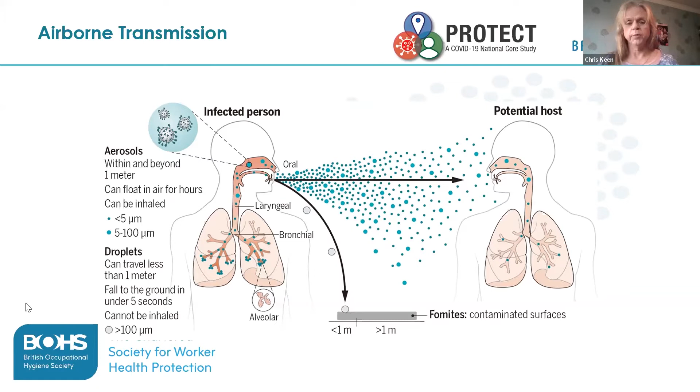And then we have aerosol transmission, which is where I'm going to focus my talk. This can happen in the far field, much further than 2 meters. When we emit droplets as we breathe and speak, you've got a range of droplet sizes coming out, and even the large droplets evaporate very quickly. They become lighter, and the lighter they become, the longer they remain airborne and the further they can travel. So with aerosol transmission, we're talking about far field transmission, and you're not necessarily safe even beyond 2 meters from an infected individual. Next slide, please.

So just coming back to the direct droplet transmission, just to reiterate what I said on the last slide, this is near field, less than a couple of meters, generally within a meter. Quite straightforward to control this transmission. It's not always easy to implement these controls in the real world, but in theory,

if we could all remain more than 2 meters away from everyone else, if we can erect things like physical screens or barriers, which will take out these droplets because they fly in a straight line, they don't follow the air currents, these are large droplets, and face coverings, both on the infected individual and on potential receptors, will all reduce transmission risk via the droplet route. Next slide, please.

When it comes to the aerosol route, it's a little bit more complicated. As I've said, these are smaller particles. They will remain airborne for much longer. They will travel greater distances than 2 meters. There are a number of risk factors for aerosol transmission. Clearly, it will almost exclusively happen indoors. It's very unlikely that aerosol transmission will go on in an outdoor environment because of the ventilation rates outdoors.

So obviously the principal risk factor is the likelihood of actually having infectious individuals within the indoor space in the first place. The duration of any interactions is important. Aerosol transmission is most likely not going to happen in a single instant. So the longer that individuals mix together in a single space, the higher the risk of aerosol transmission becomes. The activity within the space is a factor.

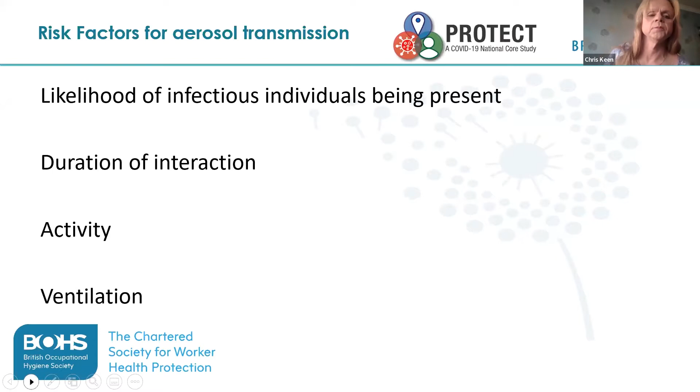So just a few basics around ventilation. First of all, air movement in indoor spaces can be very, very complex. Air doesn't always do what we expect it to do. Anyone that's familiar with CFD modeling, or anyone that's ever seen air movement visualized in a room, will realize you get all sorts of eddy currents whirling around, you get air flowing back on itself, you get dead spaces in the corners of the room. So air movement can be quite a complex thing.

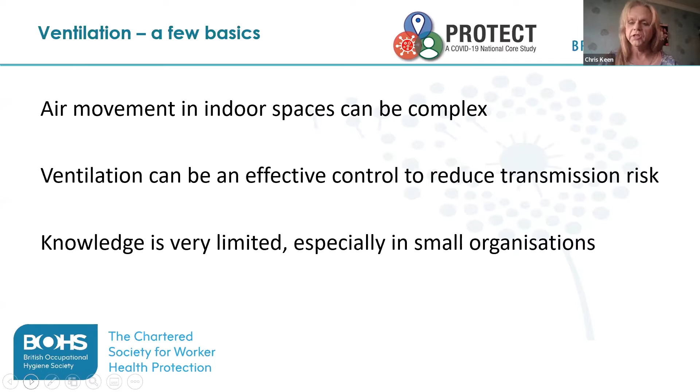There's no doubt that good ventilation can be a really effective control to reduce transmission risk. And what we've found, certainly on the Protect research that we've done in the UK, when we've been into outbreak situations in a workplace environment, is that the people that are actually managing these spaces, these buildings, their knowledge of ventilation is really rather limited. Beyond controlling the temperature in the space, they don't really understand ventilation very much at all. Next slide, please.

So mechanical ventilation I'll touch on first. So just to be clear here, we're talking about supplying clean outdoor air into an indoor space. We're not talking about recirculating air conditioning systems. They will not reduce the transmission risk in anything like the same way as supplying clean air. They can be effective if they've got decent filters in them, but you're much better off supplying clean outdoor air into a space using a mechanical ventilation system.

Within the UK, and I guess in other jurisdictions, other parts of the world, you have your own building regulations. We have building regs in the UK. They specify minimum air supply rates into various different indoor spaces, okay? What we've found when we've assessed ventilation in outbreak settings is that quite a high proportion of buildings in the UK don't actually achieve the rates that are specified in the building regs.

So it's not good enough to assume that if you've got a mechanical ventilation system, it will be turning over the amount of air that's specified in the building regs. Certainly in the UK, a lot of buildings aren't achieving these air supply rates. And I'll touch on this later on, but if you don't have a mechanical ventilation system in your building, you're going to find it very, very expensive to retrofit one. Next slide, please.

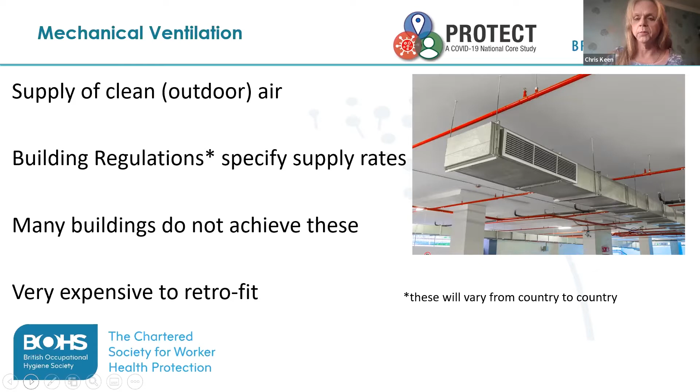How much clean air do we need to control the aerosol transmission risk? Well, within the UK again, and I say your own national regulations will be different, we talk about 10 litres per second per person of clean air being fed into a space. That won't remove the aerosol transmission risk, but we would deem that that would give you adequate control. It would bring the risk down to an acceptable level.

If you have a mechanical ventilation system in your space, it's highly likely before the pandemic that it was recirculating a proportion of the air to save on energy bills, to stop throwing warm air out of the window in the winter time. A lot of mechanical ventilation systems would have been set to be recirculating a proportion of the air. So it could well be that systems have had to be reconfigured to actually achieve this 10 litres per second per person.

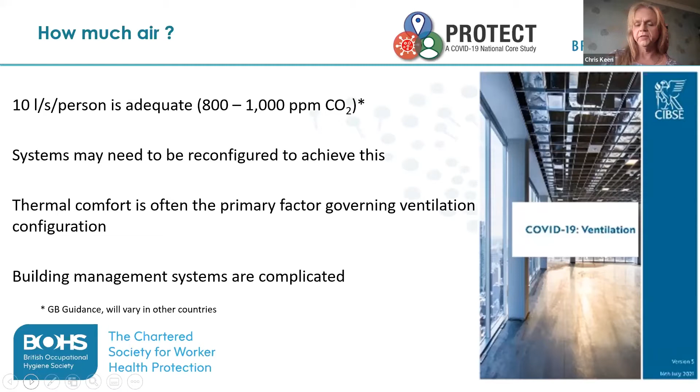Prior to the pandemic, other than specialised healthcare settings, which I'm not discussing here, I'm talking about general workplaces here, most people don't think about health risk management. When they thought about their general ventilation systems, they were there to control the temperature, the humidity, the comfort levels in that environment. They weren't there to protect against the transmission of an airborne virus. So even people that did understand their ventilation systems to an extent didn't understand them from the perspective of controlling airborne transmission risk. Next slide, please.

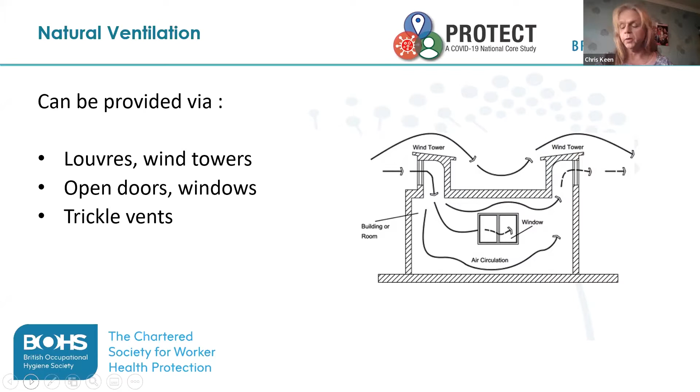I'll move across to natural ventilation now. We're all familiar with the concept of natural ventilation. We all, I guess, at some point in our homes will open the window if it gets too warm, if it's too stuffy, if we're cooking, to remove smells. You can provide natural ventilation in an indoor space via a variety of means, as you can see up on the slide there. Next slide, please.

It can be really, really simple to implement a natural ventilation solution. In some spaces, it can be as straightforward as opening windows. And we found that, certainly in some small, poorly ventilated indoor spaces, just opening the windows can increase the ventilation rates by an order of magnitude. And that can be all you need to do if that's possible.

But it is often the most practicable option. As I said before, if you don't have a mechanical ventilation system already installed in your building, it's going to be a big job and an expensive job to install one. So you're left relying on improving your natural ventilation to adequately control the aerosol transmission risk. Open windows and open doors can provide adequate ventilation, but that's going to need some management and supervision to work properly. Certainly in the UK, and in other parts of the Northern Hemisphere, it's quite cold outdoors in the winter, and people don't always want the windows wide open. So you're going to need some management and supervision if you're relying on open windows to control the transmission risk.

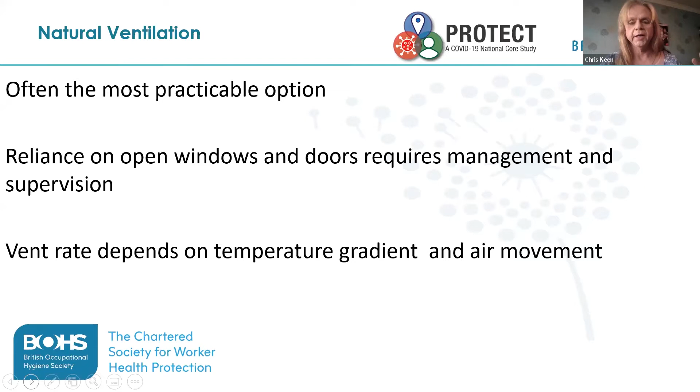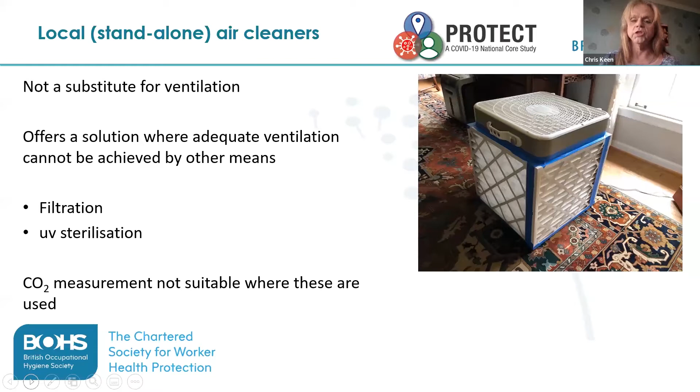I'll just say a quick word about standalone air cleaners, air filtration systems. They're not really a substitute for ventilation. They can offer a solution if you can't achieve adequate ventilation by other means. You need to think very carefully about where they're situated, about sizing the filtration unit for the size of the space and the number of people in the space. So, as I say, not as effective as ventilation, but they can offer some sort of solution if ventilation by other means is not possible. Next slide, please.

Excuse me, just let me take a drink.

So I'm going to move very quickly onto assessing ventilation. So under the Protect study, my team went out into a number of workplace environments that were actually experiencing a COVID outbreak amongst their workforce. One of the things that we had to do was to assess the ventilation in those environments, and we thought about doing this in various different ways.

We settled quite early on using carbon dioxide measurement to assess ventilation, and I think most of the rest of the world have gone the same route. It's a fairly practical, accessible option. You don't need a lot of expensive kit. You don't need sulfur hexafluoride tracer gas and things.

It's relatively straightforward to do, but you do still need a level of expertise to apply it properly and to interpret the results. It's not enough to just buy a carbon dioxide meter and walk around taking spot readings. You need to understand what you're doing. But it is a very, very useful tool to prioritize risk and to provide assurance to the users of indoor spaces. Next slide, please.

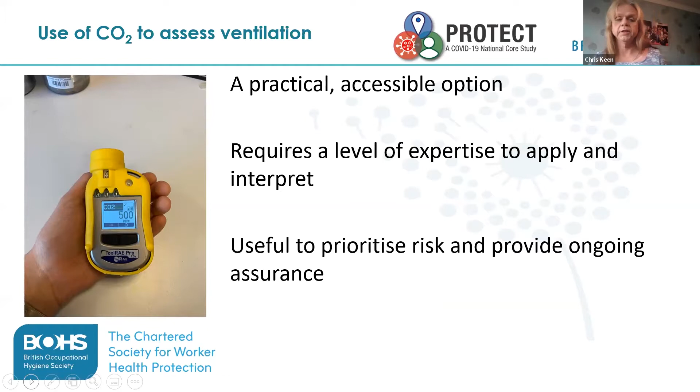I'm not going to go into all the detail on this slide. There's tons on there. I've put it up for reference, if people want to look at the presentation afterwards. This is from one of our scientific advisory committees to the government in the UK that discusses when it is and isn't suitable to use carbon dioxide measurement to assess ventilation. So as I say, if you're really interested, go back into the slides and have a look. There's too much information on that slide for me to go through. Next slide, please.

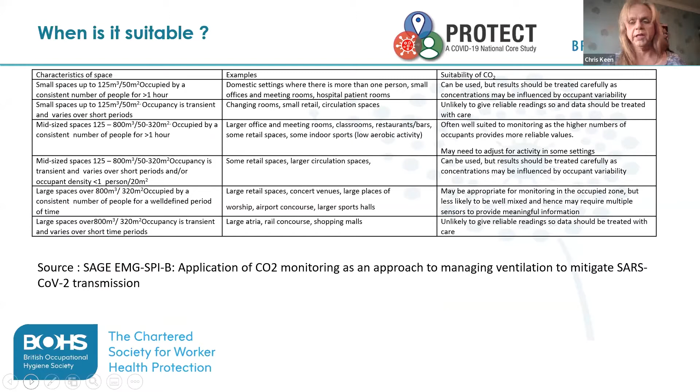When is carbon dioxide measurement not suitable to assess a space? Okay, if you've got other carbon dioxide sources present in the space, combustion being the obvious one, then clearly using carbon dioxide measurement to assess ventilation is a non-starter. We're relying here on the only source of CO2 in the space being human respiration. So if there are other CO2 sources present, either from combustion or often in food factories and some other industrial processes, they'll use CO2 as a process gas, then you're not going to be able to use this method to assess ventilation.

And if you're using filtration or sterilisation to clean the air, as I put up with the standalone unit a few slides ago, then clearly they will take out airborne particulate or they will kill airborne virus if you're using sterilisation. They will not remove CO2 from the air. So again, you're going to get false readings if you're using CO2 to assess ventilation in that kind of situation. Next slide, please.

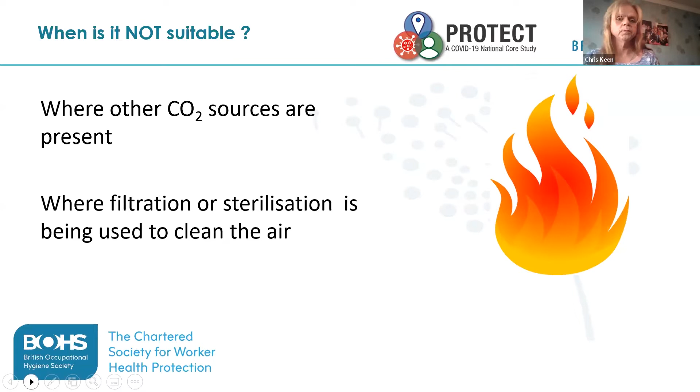So just a few simple facts around this. I guess a lot of you will know this. I'm just reiterating this. Obviously, to assess the ventilation using carbon dioxide measurement, you must do this while the space is occupied at normal, typical levels. You cannot go around a building that's empty at the weekend and use CO2 measurement to assess ventilation. You have to have the space occupied at typical occupancy levels.

It's much better to measure over a period of time, to leave an instrument in place logging for a period of days or even weeks, than wander around taking a few spot measurements. You'll get much richer data from measuring in that way. And you need to understand the occupancy data at different times of day. So if you leave an instrument logging in a space, you need to understand how many people are coming into that space, how long they're staying for, what time they're coming in, what time they're leaving, to allow you to interpret the results.

There'll be different guidance around the world in different countries, I guess, but certainly in the UK, we've settled on these numbers. If you're getting less than around 800 parts per million carbon dioxide in the space, we would say that indicates adequate ventilation. And if you're getting above 1500 ppm, we would say that indicates a pretty urgent need to improve the ventilation in that space. Obviously, there's a fairly wide band between 800 and 1500. The closer to the top end of that band you get, the more likely you need to be doing something to improve your ventilation in that space. Next slide, please.

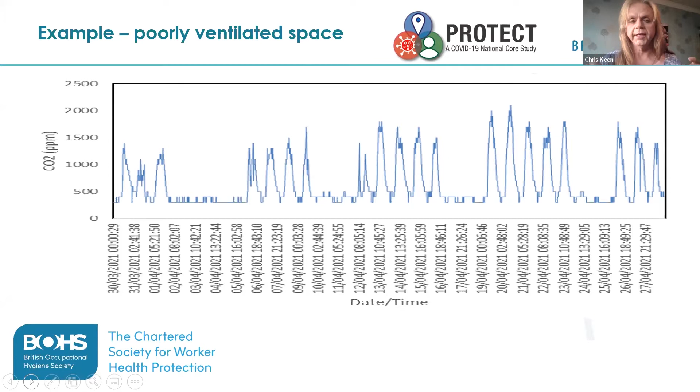So just to summarize, ventilation is often the weakest link in workplace COVID controls. People understand social distancing. They understand the need to keep a distance from one another. They understand the need for good hand hygiene, for good surface hygiene, surface cleaning. It's ventilation where people often fall down because, as I say, air is invisible, we can't see it. And it's often the thing that, certainly in workplace outbreaks, has gone wrong, okay?

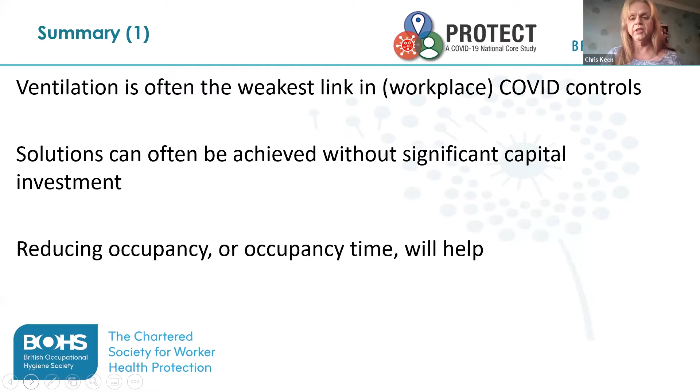As I've showed you, just opening the windows can provide significant, adequate ventilation to mitigate the risk. So solutions can be achieved without significant capital investment in some situations, okay? And if you can't improve the ventilation any further than you already have done, then the next logical step is to start reducing occupancy levels or occupancy time. All of these will bring down the risk. Next slide, please.

As I've already said, reliance on open windows and doors requires management and supervision. If you open windows and it's cold outside in the winter time, certainly in the UK, people are going to close them again. There needs to be some sort of program in place to ensure that those windows remain open. And it's not always going to be that straightforward. If you've got a complex environment, you've got restrictions as to what you can do with your ventilation for various reasons, then you may well need a specialist solution.

It could well be that you don't have the knowledge and expertise in-house to come to a suitable ventilation solution yourself. So you may have to bring in a specialist, okay? And it's important to remember that ventilation, no matter how good it is, will not mitigate against the close range direct droplet transmission, the stuff that occurs within 2 meters.

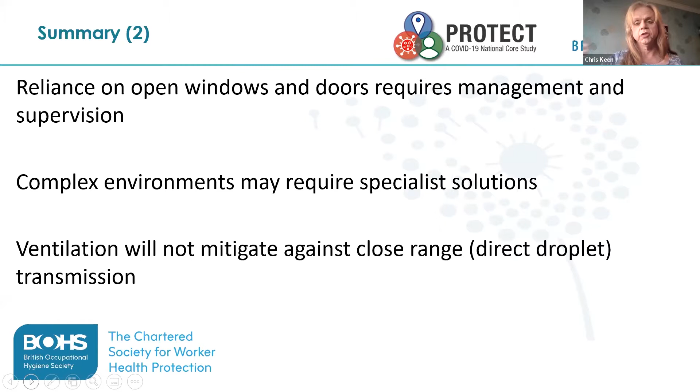Next slide, please. Just to finish, really, just to reiterate, I think we all understand this. There is no single control that's going to prevent COVID transmission in any space. You've got 3 main transmission routes. You've got the direct droplet, you've got the long range far field aerosol, you've got the surface and hand contamination. So you're going to need a suite of controls to control the risk adequately.

We've tried to represent that here using the Swiss cheese model, which you're probably familiar with. Other people have used different models, but this is just to remind that there is no single solution. You cannot control the risk with one single control. Next slide, please.

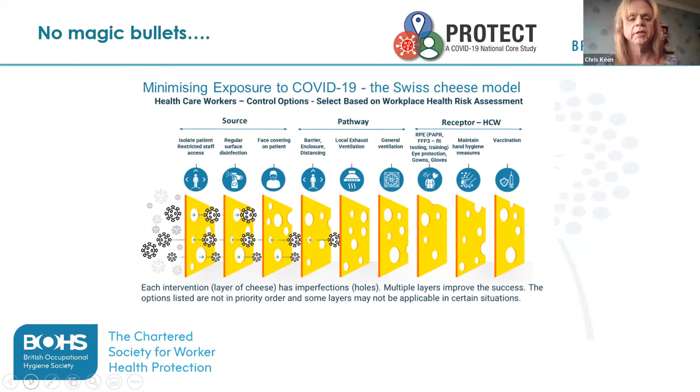Just a very quick mention of our own ventilation tool. I know other speakers are going to speak about ventilation tools that they have developed. BOHS, we have developed one. It's available on our website. You can see the link on the slide there. It's very easy to use. It doesn't provide all the solutions for every single space, but it certainly sets people in the right direction when it comes to assessing their ventilation systems. Next slide, please.

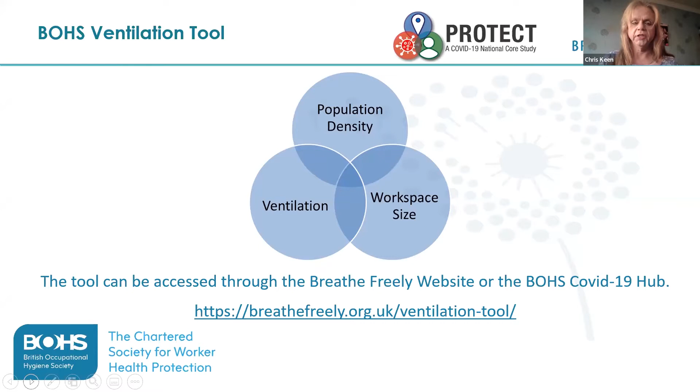And I think I've almost finished. I've put some references up on this slide just for people who want to go in and have a look and gather some more information. I apologise that most of these are UK specific. This is the area that I'm most familiar with, so I've given you a lot of UK guidance. But at the bottom there is the ASHRAE ACGIH COVID white paper, which is an excellent reference document. And I'm sure there's plenty of other things on there as well. So forgive me if I've missed your particular guidance document off that slide. And I think, Marianne, that's me finished.

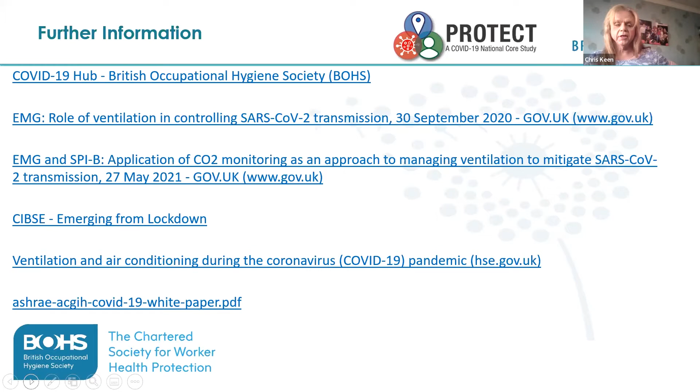Chris, that was great. That was so interesting. And reiterate what Chris said. Go back and look at the presentation because there's a lot of really good information there.

Yeah. Our next speaker, this is John Oudyk. John's an occupational hygienist with Occupational Health Clinics for Ontario Workers, and he'll talk about a tool to assess ventilation. A little bit more about John. He's worked with the Hamilton Clinic of Occupational Health Clinics for Ontario Workers since 1989.

He's been active following infectious disease exposure and prevention developments in healthcare and other settings since SARS-1, advising, and he's carried out site exposure investigations and conducted extensive surveys of healthcare workers. He's been a member of research teams investigating the conditions of infection transmission.

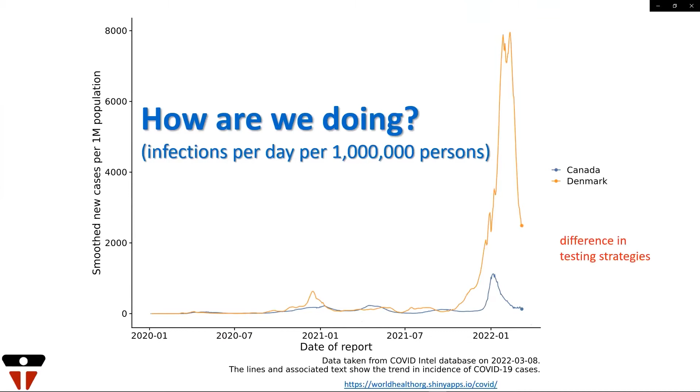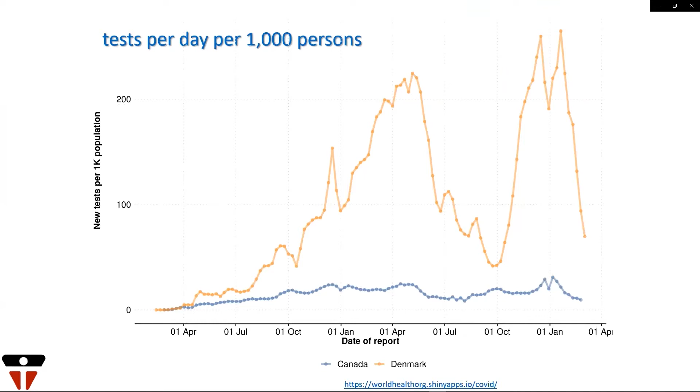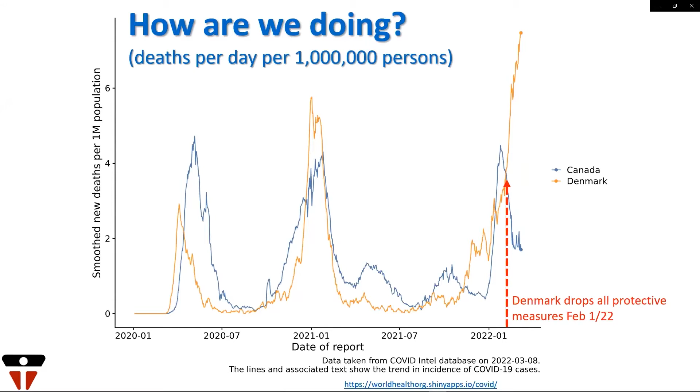So if we look instead at deaths per day per million people, this evens out the comparison a bit. And you can see that for Canada and Denmark, we've had a similar death experience for the pandemic, except recently. Since Denmark opened and dropped all measures in the beginning of February, its death rate has risen to a quite high rate, whereas Canada's has lowered. And the reason they gave was they decided that their population is responsible enough that they can manage the pandemic at an individual level, not requiring state intervention.

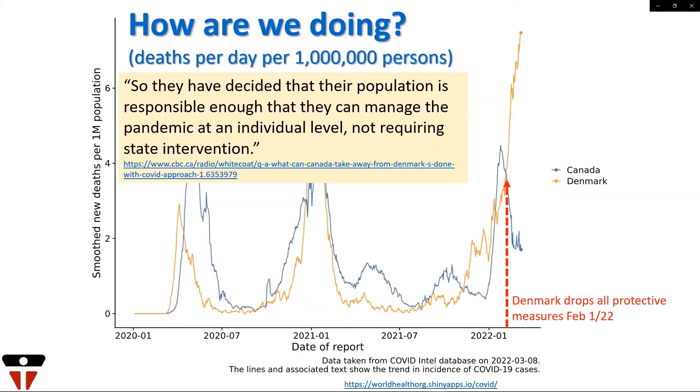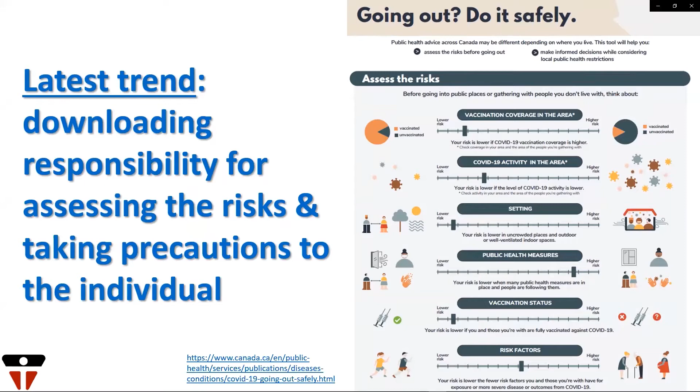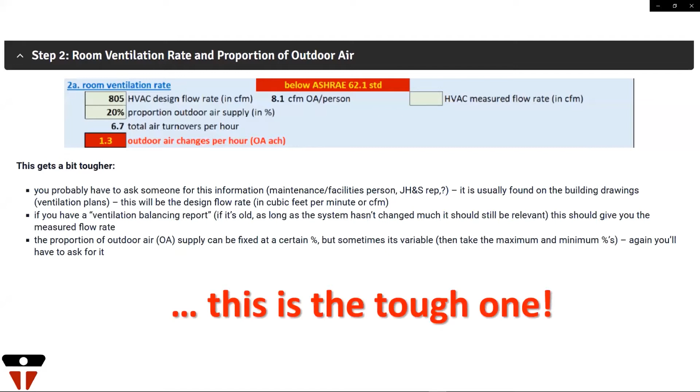Starting off, you describe the workplace, the type of ventilation, the size of the room, and the capacity. It also calculates whether the distancing is achievable. Next, you put in the room ventilation rate. Now this can be a little more difficult to get, and I'll describe a number of ways you can get at this number. So it's really the tough one to get. First of all, you can ask, but when you ask, are the people you're asking actually competent enough to answer? And do you trust them to be looking after your health?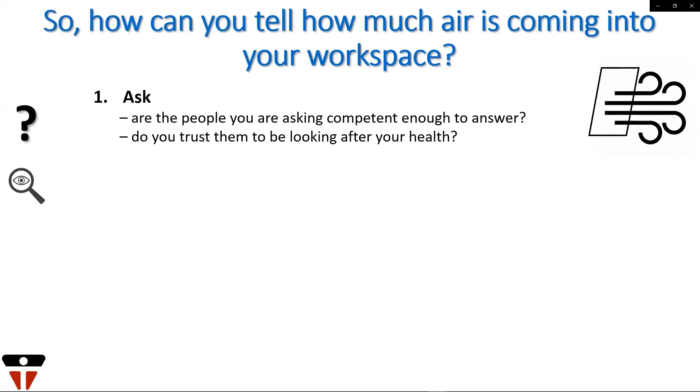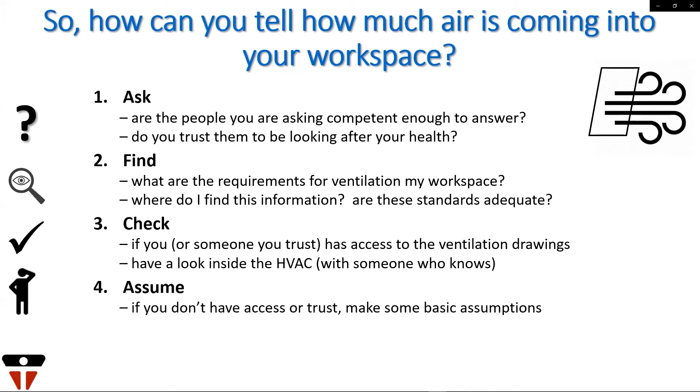You can find out what the requirements are for your type of workspace. And there are standards, but sometimes these are difficult to find. You can also check if you or someone you trust has access to the ventilation drawings. You can get the numbers from there. You can also have a look inside the HVAC unit with somebody who knows what the parts are. It's a good way to learn about the system that's providing the air to your workplace. If you don't have access or you don't have trust of the people who are giving you information, you can make some basic assumptions and compare them to what you're being told.

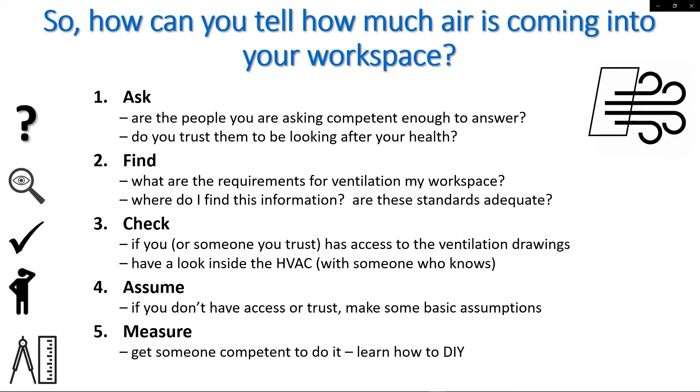And finally, you can actually measure it. You can get somebody competent to do it, hire a consultant, or you can actually learn how to do it yourself. So how much air is coming into your workplace? Find someone who knows, people like a maintenance person, a caretaker, a person who comes in to look after the ventilation system, or a health and safety rep. And you might want to check to see if they just know the number off the top of their head, or they actually have some piece of paper or some documentation to back up what they say. And if not,

who knows? One of the things you need to find out is how much of the air that's being circulated through your room is actually fresh air. What's the percentage of outdoor air or fresh air? And generally, again, the same kind of people might know, but there also might be documentation. As a rule of thumb, generally ventilation systems are designed to provide anywhere between 10 to 30% outdoor air, and the rest is recirculated air.

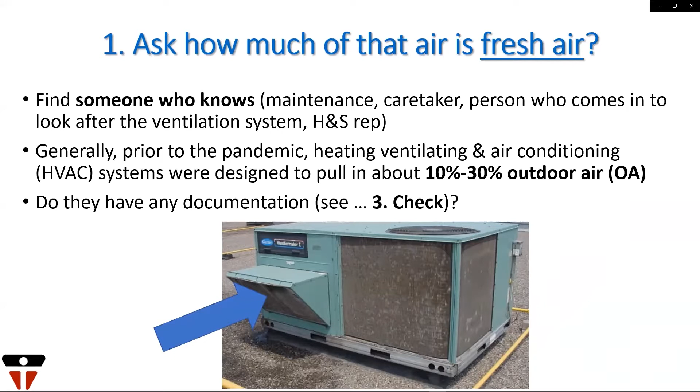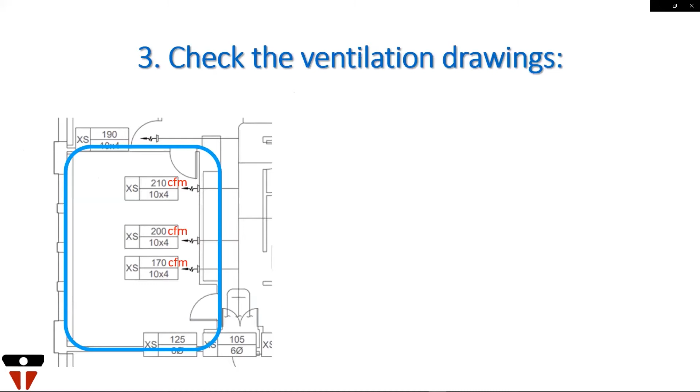You can check the ventilation drawings. Here's an example, and you can see within this room there are 3 vents, and each one provides a different amount of air, 210 CFM, 200 and 170 CFM, and they're coming through 10-inch by 4-inch grills that are in the wall. And when you add it all up together, this room is getting 580 CFM.

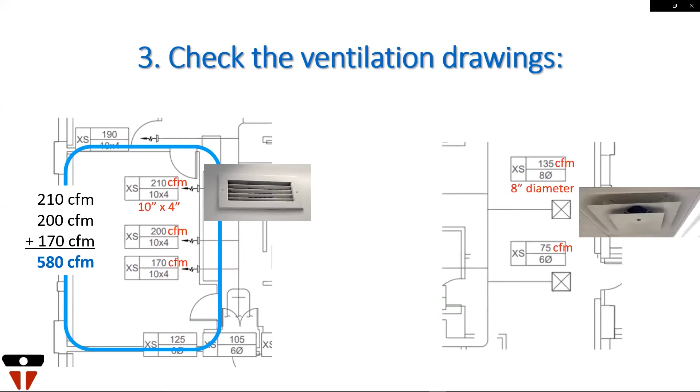Now you may also see something like this, which is a vent. One has 135 CFM, the other has 75 CFM, and they probably look something like this on the ceiling. And the lower number, the 8 with the 0 with the slash through it, means it's an 8-inch diameter.

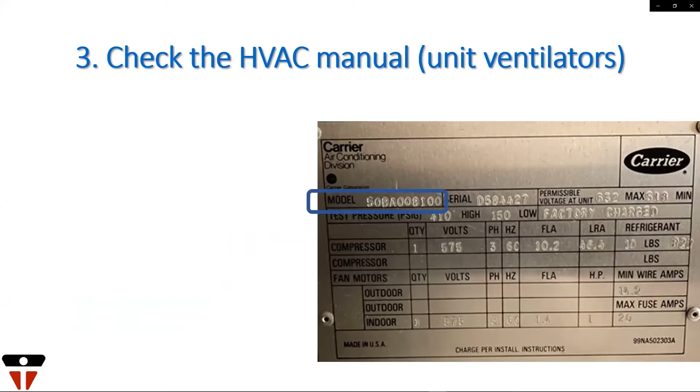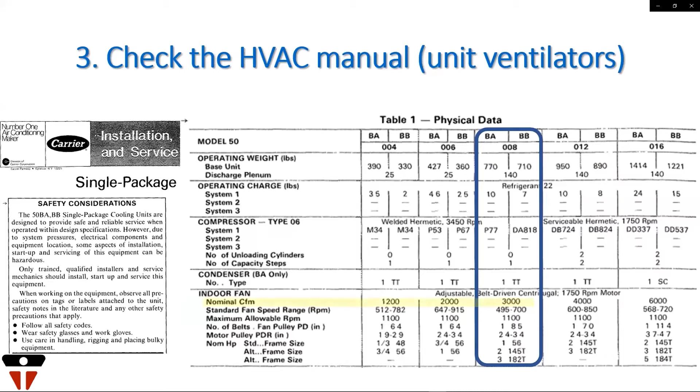You can also check the manual for the heating, ventilation, air conditioning unit. And here you see a boiler plate, which gives you the model number, and you can go on the internet and look this one up. Also under the manufacturer, you can find the service manual, and in the service manual you can figure out which system is your system, and you can find out how many CFM, in this case 3000 CFM.

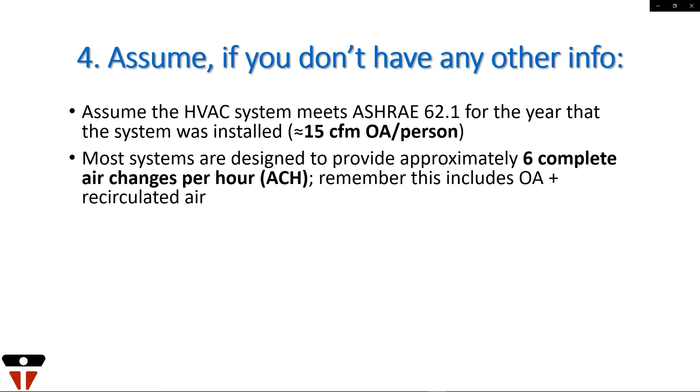You can also assume, if you don't have any other information, generally HVAC systems that meet the ASHRAE standards provide 15 CFM of outdoor air per person, roughly. Also, there's another way of figuring it out. Generally, systems are designed to provide approximately 6 complete air turnovers per hour, and this includes both outdoor air and recirculated air put together. Another design rule of thumb is 1 CFM per square foot. So if you have a 300 square foot room, you can assume a total circulated airflow of about 300 CFM.

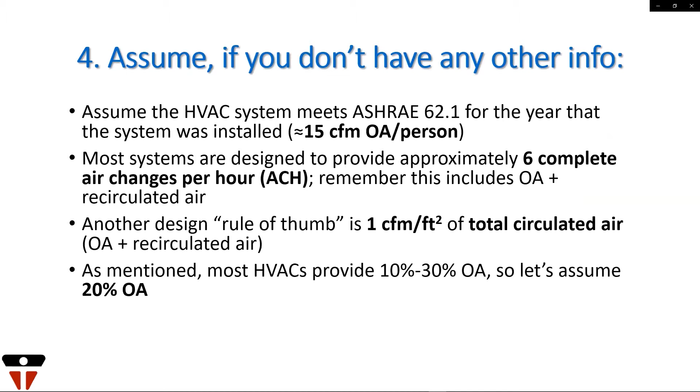As mentioned before, most HVACs provide 10 to 30% outdoor air, so let's just assume 20% outdoor air. You can vary that if you think they're providing more. And between these assumptions, along with the room dimensions, you should be able to estimate the airflow through your room from the HVAC system.

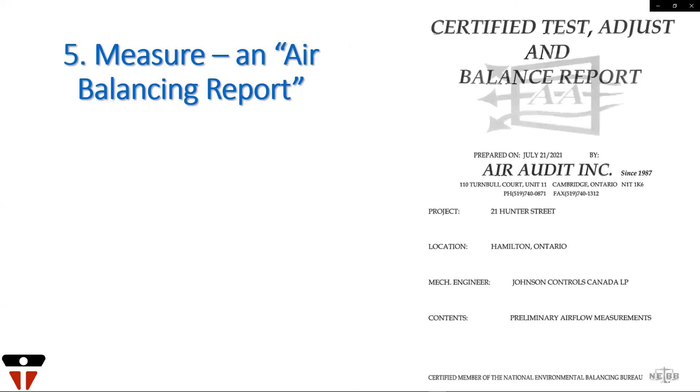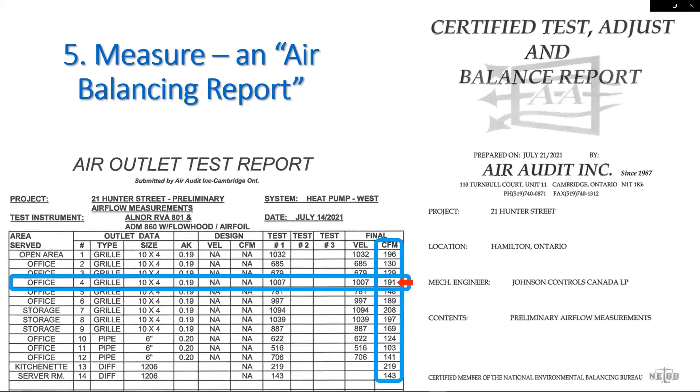You can also have outside people come in and do a proper measurement of how much air is moving through each room, and this is called an air balancing report. And what this does is they go to each diffuser and measure how much air is going through it. So for instance, here are all the cubic feet per minute for each of the diffusers, and if office number 4 is our office, we know that we have 191 CFM of air, total air, recirculated plus outdoor air coming through the room.

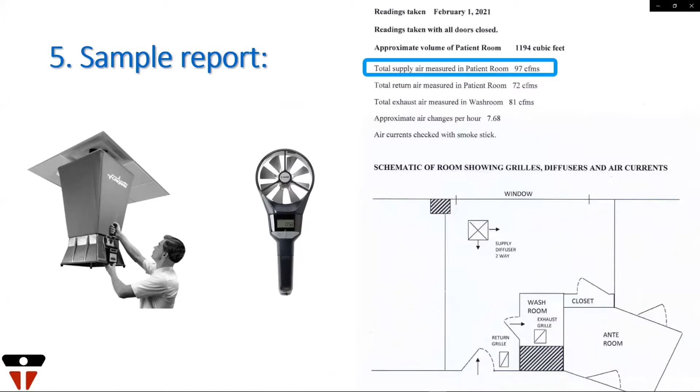Here's another sample report, and here are some of the machines that are used to measure the airflow. And you can see here that the supply for this patient room is 97 CFM. However, the return and exhaust together is about 153 CFM, and if you calculate it out, you can figure out how many air changes per hour, and that would be about 7.7 air changes per hour.

You can also see that they checked which way the air was flowing with a smoke stick. This is a little stick that produces smoke, and as you open the door, you can see whether the air is coming in or coming out.

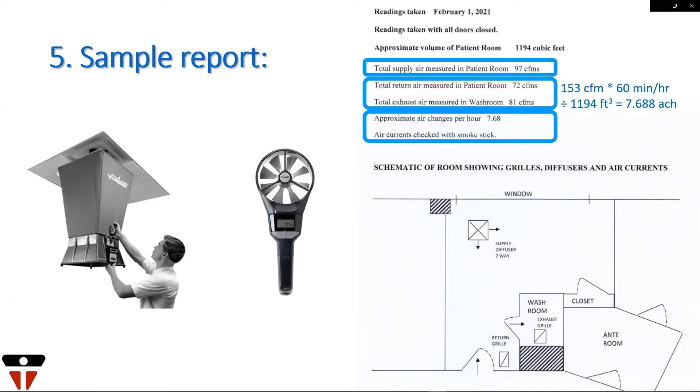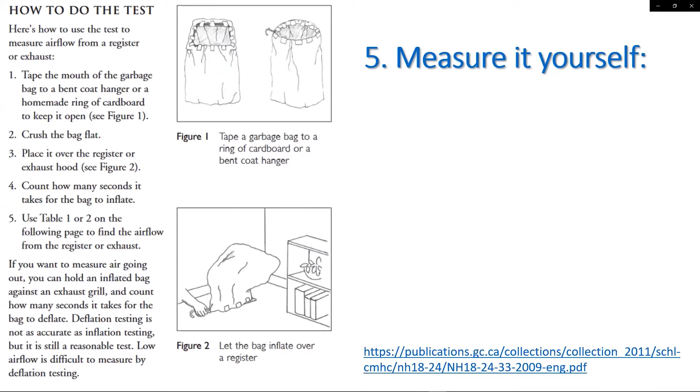You can measure it yourself. This is a plastic garbage bag with a coat hanger put around it, and here you can see it's being put over a register in a home, and you can measure the time that it takes to fill up the bag, either with a stopwatch or with your cell phone. And from that, knowing the volume of the bag and the time it takes to fill it, you can figure out how many cubic feet per minute is coming through that register.

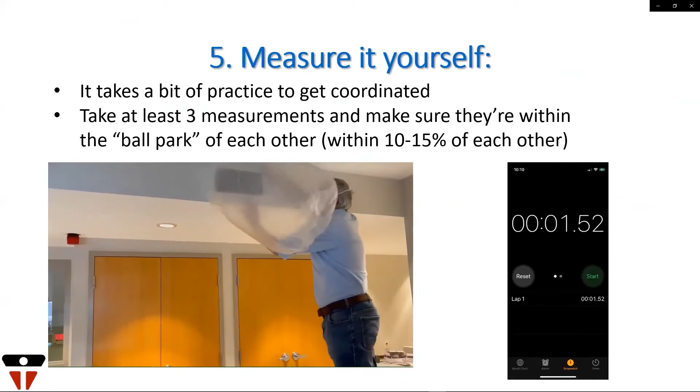Here's an example of me doing it. You place it over the diffuser and you time it from when it fills up. And it takes a bit of practice. You should do at least 3 measurements just to make sure they're within the ballpark of each other, about 10 to 15% of each other. And that's one way that you can measure the airflow in your room.

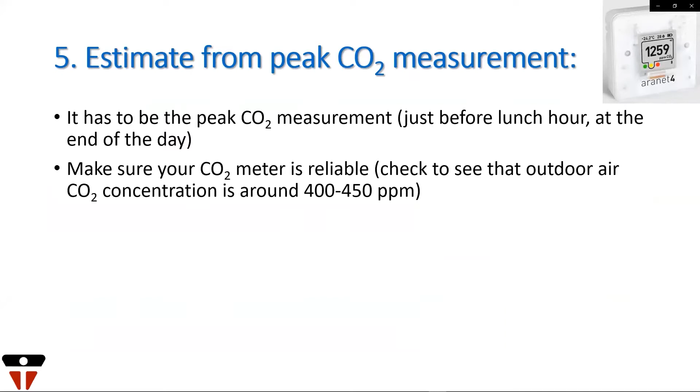You can also get an estimate of how much air is flowing through your room by measuring the carbon dioxide. It's a surrogate. We exhale carbon dioxide, the air comes in and dilutes it, and so you can figure out how much dilution is happening by measuring the CO2 concentration. You have to make sure your CO2 meter is reliable, and the way to check it is make sure that the outdoor air concentration is somewhere around 400 to 450 parts per million.

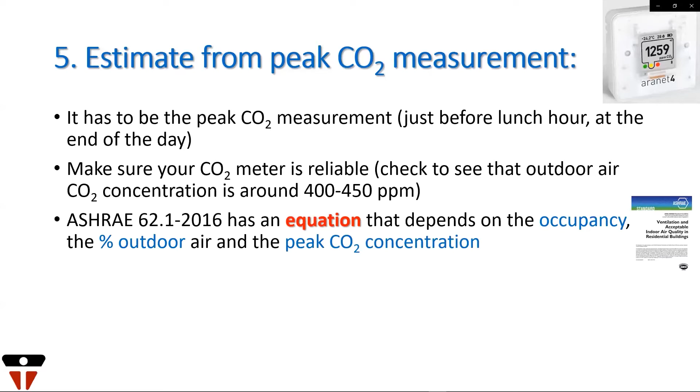The ASHRAE 62.1 2016 standard has an equation in it, and it uses occupancy and the percentage outdoor air, and you can correlate that with the peak concentration of carbon dioxide. Also, as we mentioned before, outdoor air intake rates are usually between 10 to 30%, so if you assume something like 20%, here we have an example where we have 2,700 parts per million of carbon dioxide in a room with 20 people and 30% outdoor air, and the equation will give you the result of 301 total CFM recirculated and outdoor air going through the room.

And if 30% of that is outdoor air, then the amount of outdoor air for the overall room would be 90 CFM, and if you divide 90 by the 20, you'll see we're much lower than the 15 CFM that's recommended by the standard.

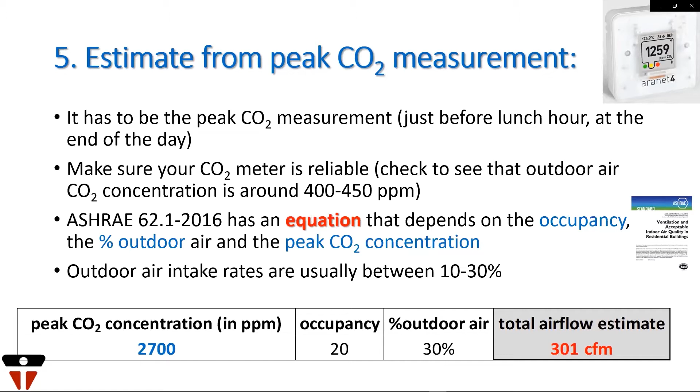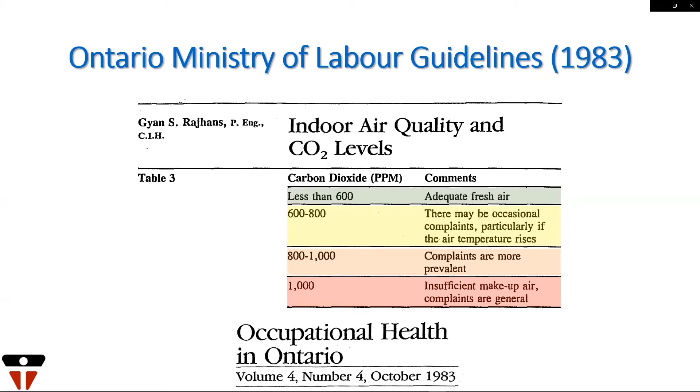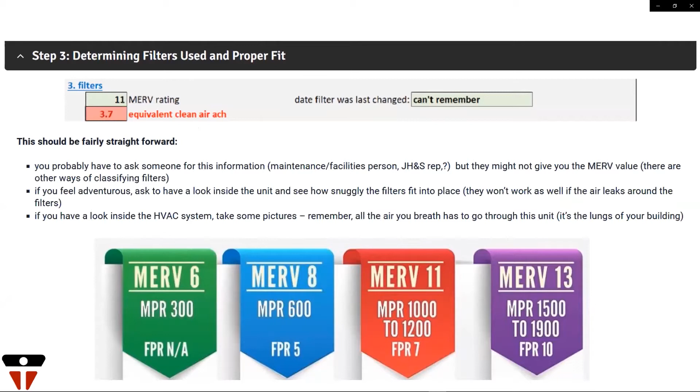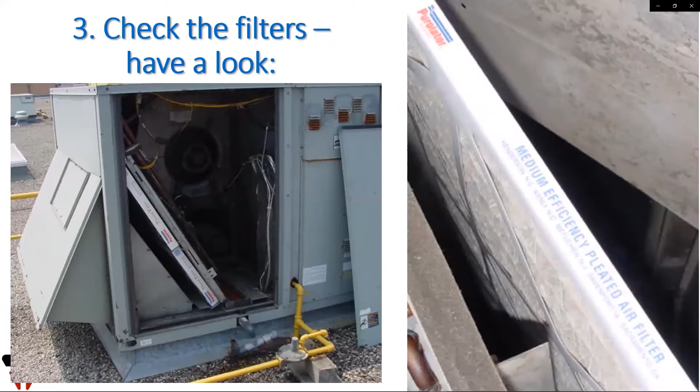Now the next section in the template, the calculator, has to do with filtering. And here you need to find out how good the filter is, and there are different ways of measuring it. MERV is the one that's used for HVAC systems, but here there are four different types and it shows you the equivalent in other types of rating systems. In order to figure out what kind of filters you have, you can ask people, but you should also have a look. Go up with a competent person, shut off the machine, open it up and have a look at what it says. You can read it on the side of the filter usually, and they can look like many different things. Here are some different types of filters and various stages of cleanliness.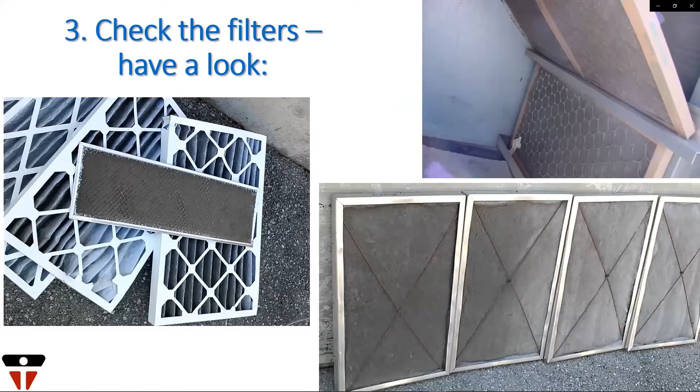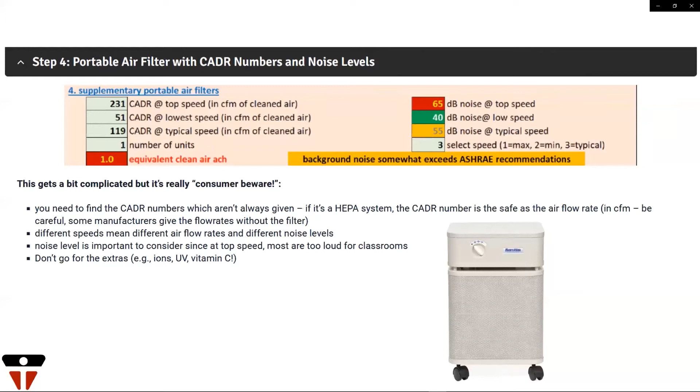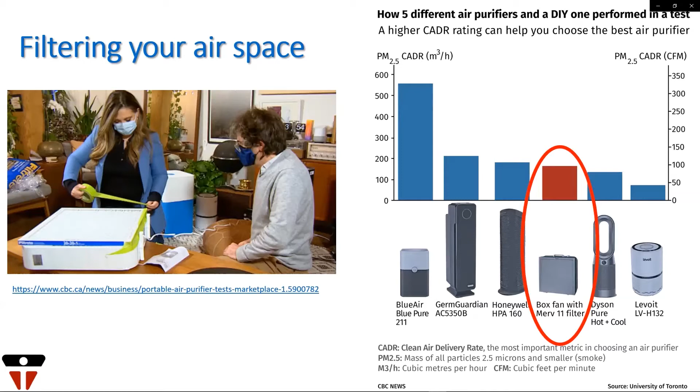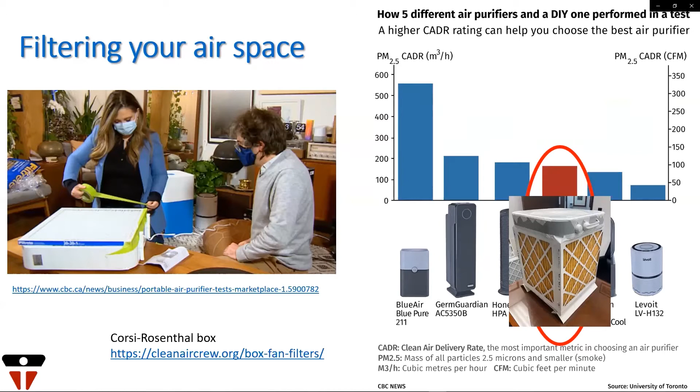The next stage in the spreadsheet is to look at portable air filters. And these are based on the Clean Air Delivery Rate numbers, or CADR numbers, and you can find these online or in the manual. You can also make your own. Here's a picture of a CBC news item where Jeffrey Siegel is describing how to tape a filter to a box fan and use that instead of the more expensive units. And when he compared them to the others, the box fan with the MERV 11 filter was quite comparable to the more expensive portable filters. And here's a Corsi-Rosenthal box, which is 4 or 5 of these filters built on. It becomes more efficient the more filters you have. And it's a way of cleaning the air much more efficiently and for a lot less cost.

Finally, we have any supplementary fans. If you have a fan just blowing things around inside, that's not necessarily advised because you might be blowing someone's emissions from one person to another. But if you're blowing it out a window, you can figure out how much air is leaving and how much would be coming in to replace it. So once you put this all into the spreadsheet, you have your final result and it's ready for posting on the door. So here we have our door. We post it so everyone can see when they enter the room what type of ventilation system is being provided in this room.

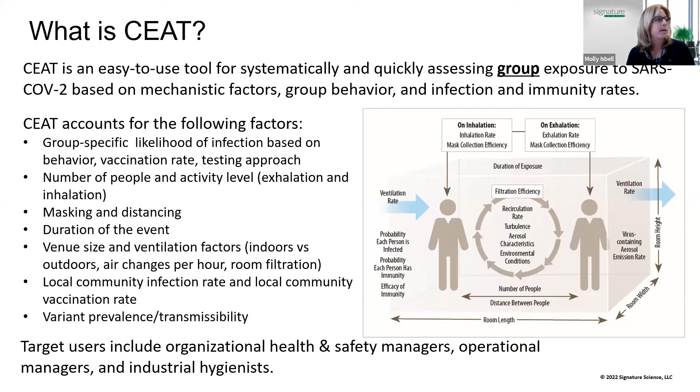So as we learn more and more about what's happening, that's also a factor that can be input into the tool to then understand how that is affecting the exposure. So those are the different factors that are taken into account. If we go into the next slide, Brian, there's a few features of the model that we wanted to talk about, and there's not time today to talk about all of the mathematics behind the model and explain the algorithms. We have developed a draft manuscript that we are submitting for peer review and publication. That manuscript is available on bioRxiv, and we'd be happy to talk to any of you in a lot more detail after this meeting about the algorithms and the modeling approaches behind it.

But for purposes of what we're wanting to show you today, there's some things about the tool that I think are important to understand. We talked in the previous slide about the fact that a user can come in and turn different knobs associated with the event, kind of what the scenario is. The way we built the PDF tool, which you'll see in just a minute, is you can actually enter information for two different events side by side. So you can say, what if I change the number of people, or the duration of the event, or my masking strategy? So you can turn the knobs differently for the two events and see side by side how that is impacting the risk. And we think that was important as you're thinking about how to come up with different mitigation strategies and what those impacts might be.

Another important thing to understand about the tool is how we are expressing the relative exposure risk. As we were doing this, we wanted to come up with a quantitative number, but we also understand that just a number is like, what does that mean? What does a number of 100 mean? What does a number of 10 mean? Is that low? Is that high? So we said, what really makes sense is let's benchmark this as something that we can describe, so that when you look at that number, you've got a frame of reference. So we looked at the United States Occupational Safety and Health Administration.

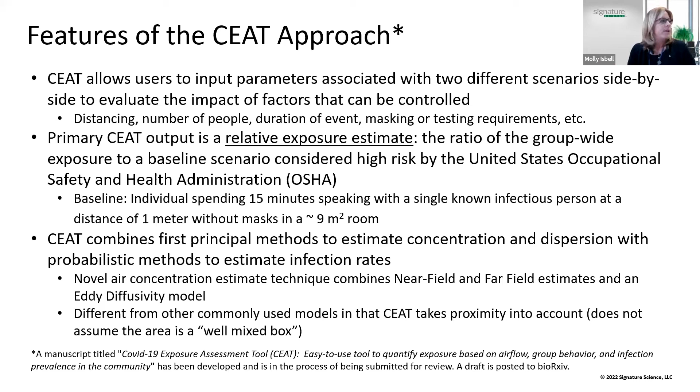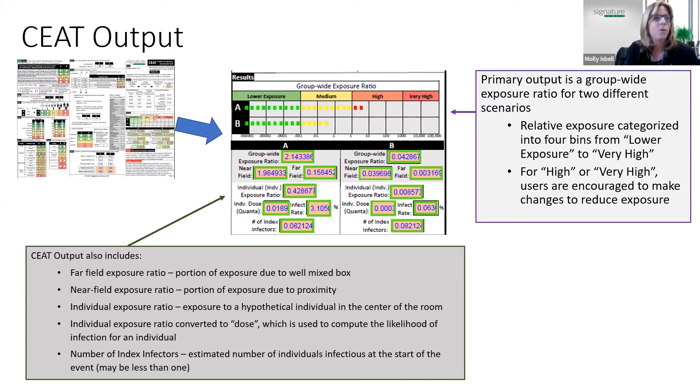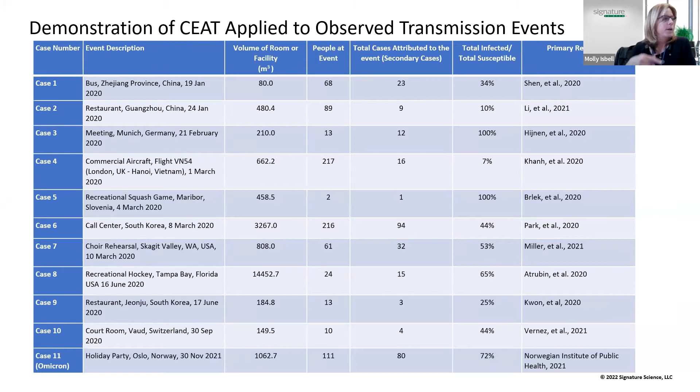If you look at the next slide, we took the case data for these 11 cases and inserted it into the CEAT tool. This is a graphic showing the CEAT result for exposure risk relative to the number of observed infections. The biggest takeaway from this slide is that for all 11 of these cases, where a fair number of infections occurred following the event, CEAT did put this at least in the high, in some cases bordering on the very high exposure level. So again, that's not a full-blown validation of the model, but is at least a demonstration of the applicability of the model.

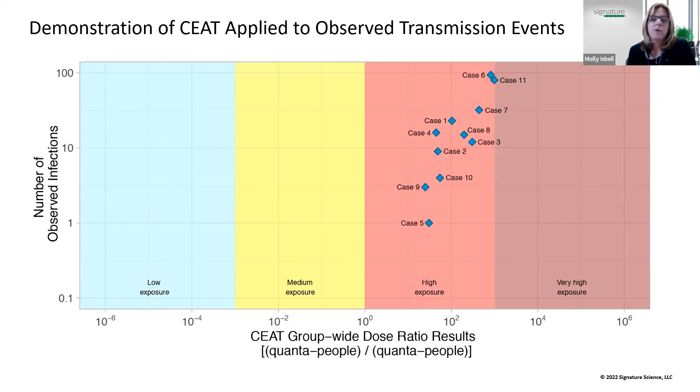And again, this is a demonstration. It's based on a handful of case studies. These kinds of things are very difficult to validate because it's only after the fact that you have data, and you don't always have all of the information that you would input into CEAT to know what the tool would have given you. Nonetheless, it gives us some assurance that the tool is giving a reasonable indication of the exposure risk.

And then the final slide before I turn it over to Brian to do the demo of the tool: we wanted to mention that the tool has also been used in practice. So some of the folks that were involved in this consortium, Brian, I don't know if you can switch to the next slide or not. Sure.

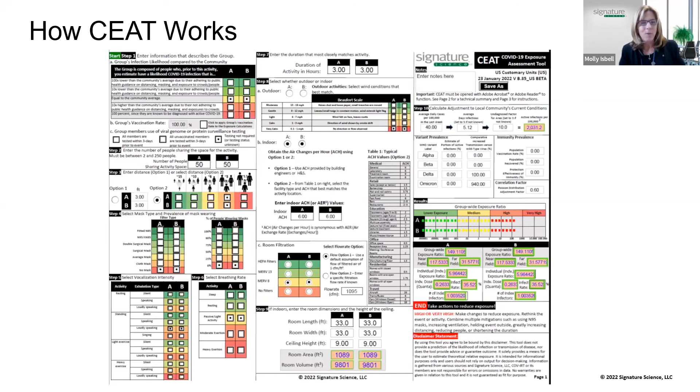My technical background is in air pollution meteorology and in environmental engineering, despite my having worked in business development, as was mentioned at the beginning. So I was applying my technical background in those areas when we made this model.

So the first thing I wanted to point out about the model is that it is publicly available. We'll send you a link in our slides for how to get to it and download it. It doesn't cost anything, and it's available through our partner at the COV-IRT group that Molly had mentioned. And we have both an SI or metric version and a US customary units version for those that are not familiar with cubic feet per minute and would rather have it in liters per second, for example. We can do both.

So the other thing about the model is that it is actually a model that is running inside a PDF, which sounds strange, but you can actually write code in JavaScript and have that running inside a PDF document. And we chose to use a PDF document because it's an easy way to distribute something. And also, once you download it on your system, it's private. Nobody is seeing what you're entering into it. And we thought that was useful for some organizations and people that don't want to necessarily have their information shared with other organizations.

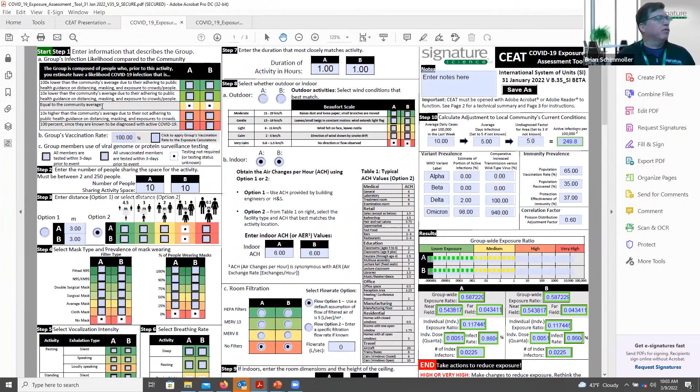Great. All right. So the first thing you would want to start off with here is to understand the group that you're working with. You would describe your group in terms of their compliance with public health guidance, for example, and you might want to assume that they're average for your community. And you can also apply the specific vaccination rate for the group if you know it. And you also can apply some information about surveillance testing if that is being used in your group.

And the next thing is you specify the size of the group between 2 and 250 people. And we're going to change one of these to 5 and keep one of them at 10. And you're looking at 2 scenarios, scenario A and B, all the way through this. And the next thing you can put in here is what's the distancing for the group. So you might have it at 2 meters, might have it at 0.5 meters, or you can enter a specific value here if you choose to.

And then the next thing is you choose the masking characteristics that are being applied by either group. Let's say they have N95 masks on and what % are wearing it. Let's say 100% are wearing it. And then you decide what activity is being engaged in. So you can change the activity as well. And that changes essentially the amount of emissions that are potentially happening for infected individuals.

And then the breathing rate can change as well, where you can change their level of exertion, which affects the inhalation of anything that's in the air. And then you choose indoor or outdoor, and then the math is slightly different for the indoor or outdoor environment. But as was said earlier by Chris, outdoor infections are very, very rare, and the model would sort of show that as well.

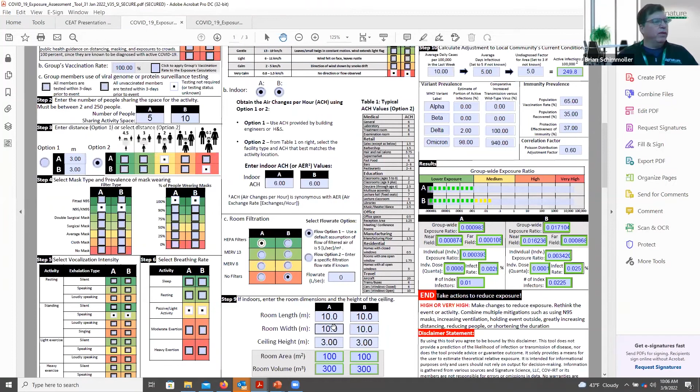And then you choose your room filtration scenarios. You can choose no filters all the way up to HEPA filters. And all the while you make these changes, the model adjusts. And then you specify the room size, the width, the height as well. And then the last area is where you're entering information about the local community. And this is essentially what drives the likelihood of an infected individual in the room.

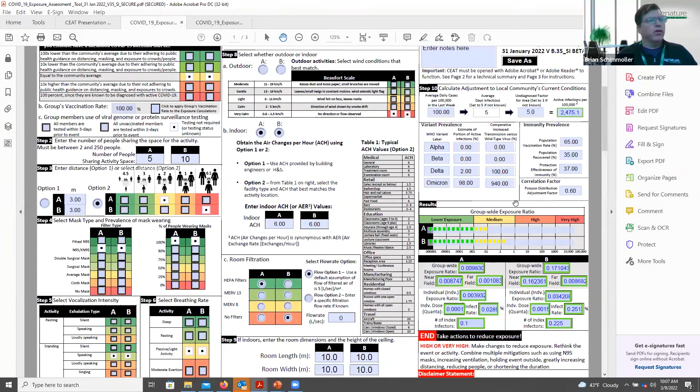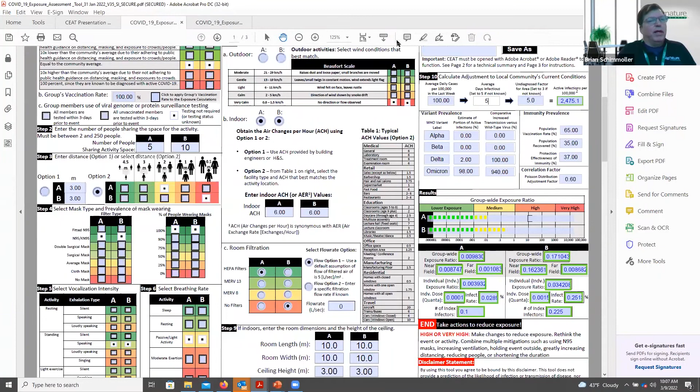So, as that changes, that'll go up, and then we can enter information about the prevalence of a variant, and the model adjusts the relative transmission rates based on published data. We recommend where to go to find this data in the instructions section, and then some information on the immunity, and then finally the results are shown. So that's a lot to take in in this quick amount of time, but I'll stop here and allow questions for any of the speakers today.

Thank you so much to all our speakers. I'm pretty familiar with the tool that John Urek presented. I'm really anxious to spend a lot more time with Molly and Brian's tools. It's very exciting. And I see we have some more hands, so I will make this quick.

But I'm really curious how people are using it now, given the vast variety in prevention measures, especially across the US. The CDC recently published a map with different risk levels on the community level. So do you see people using your tool to match it to the community level and determine community-based prevention measures at that finer grain?

Well, this is Brian. That guidance is new, and it really goes one step beyond transmission, as you probably realize. The CDC guidance is also taking into account hospitalization rates in the community. That is not actually accounted for in our model. Our model really just focuses on transmission. So we haven't really sorted out the relationship between the two.

And I'm in a county right now in Virginia where we're high here and we're still wearing masks. But our transmission rate shouldn't be that high because the cases per 100,000 aren't high, but the hospital system has some large number of cases, so we are still in a high county. So that's our answer.